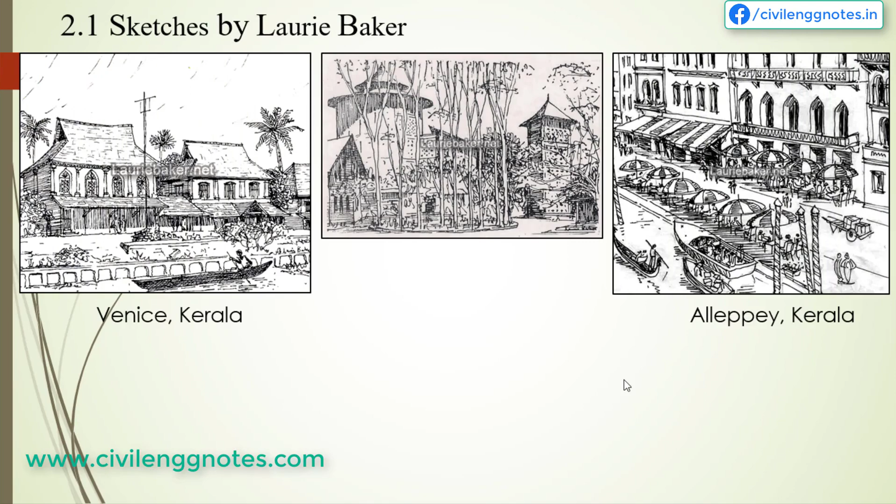Here are some of his drawings. Believe it or not, Baker made all these drawings by hand. He took old pieces of paper from envelopes and other waste plain papers and made a diary-fashioned book, which he always carried wherever he went.

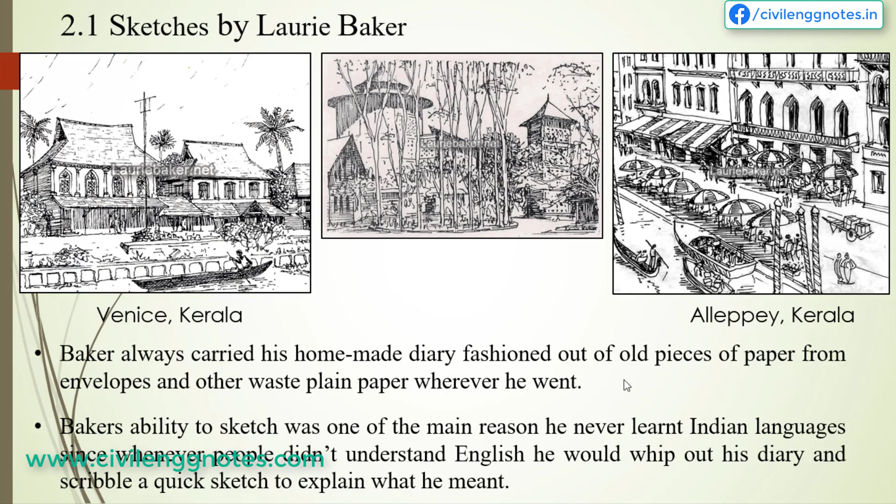Baker's excellent ability to sketch was one of the main reasons he never learnt Indian languages properly. Whenever people could not understand his language, he would bring out his diary and scribble a quick sketch to explain what he meant. Now let's talk about the principles he followed in his work.

The first of these is his respect for nature. We can always see his consideration for local climate, prevailing wind direction, and use of available topography while designing a house. Baker always tried to place small water bodies in proper places so that cool air could enter the house in summer.

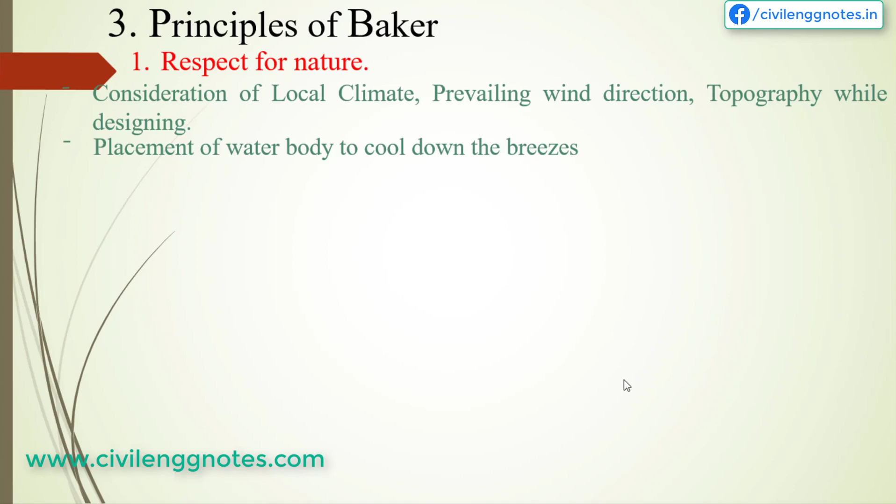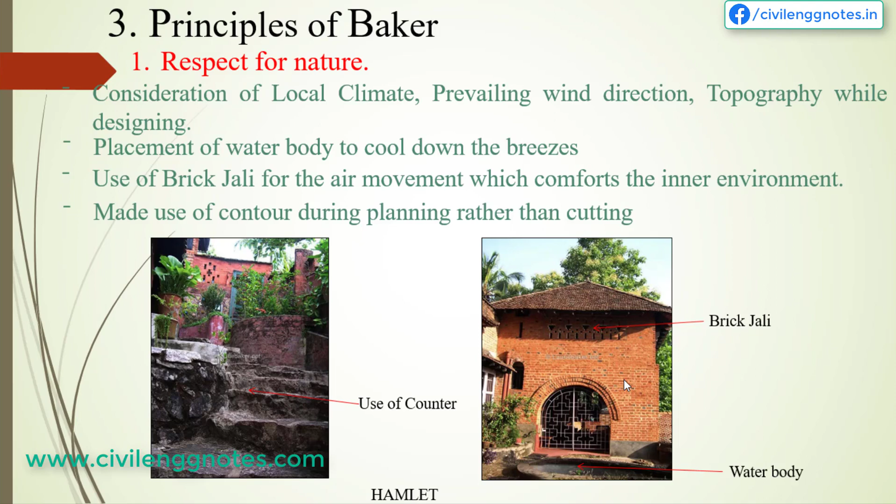Instead of using grilles or wooden windows, Baker used brick jali for air movement, which comforts the inner environment while reducing construction cost. He also made use of contours during planning to reduce cutting work, which ultimately reduces the cost of construction.

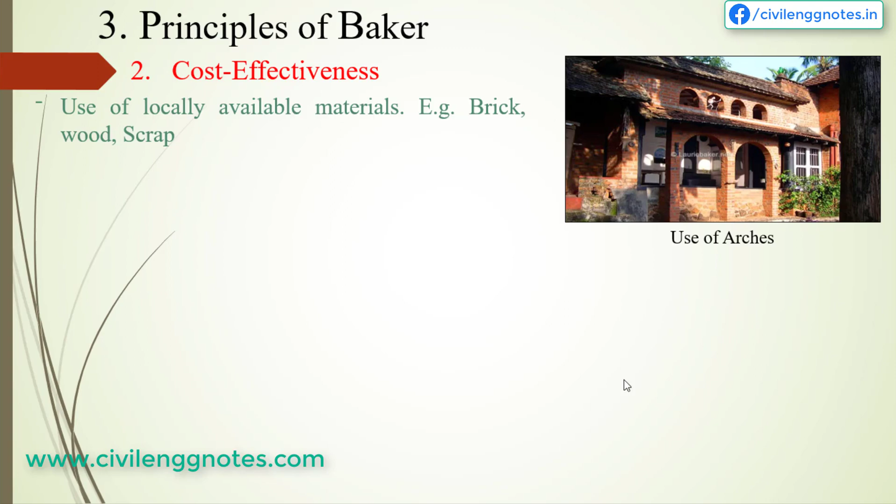Baker's second principle was to make the building cost effective. That's why he always used locally available materials such as brick, wood, scrap materials, etc. He also tried to reuse some materials when possible. We can also notice reduction of unwanted structural elements along with reduced use of fabrication work in his design.

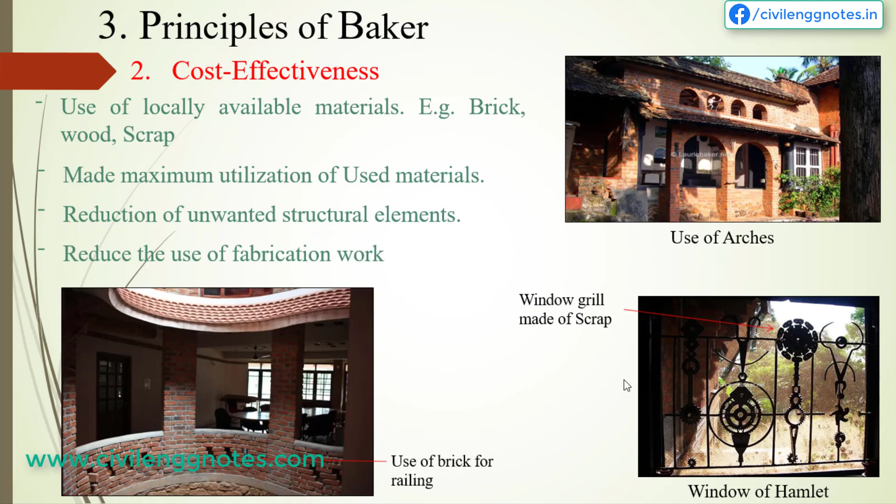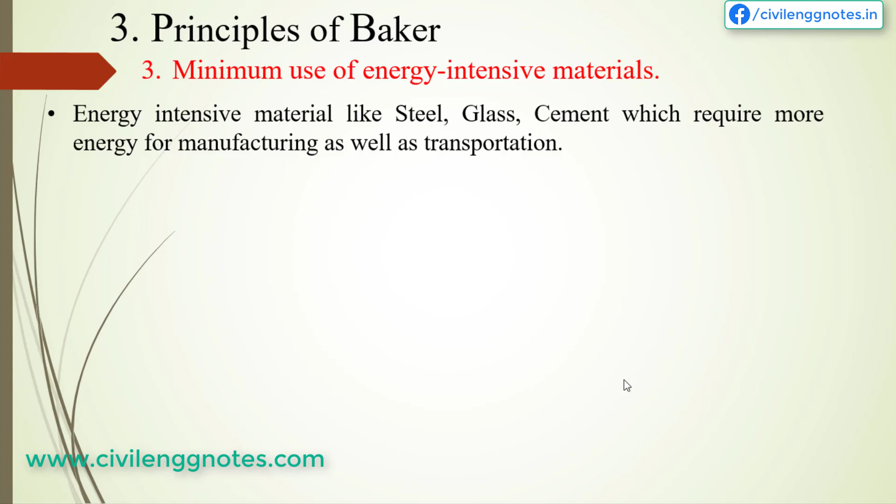Baker's third principle was to use minimum energy-intensive materials. Materials like steel, glass, and cement, which require more energy for manufacturing as well as transporting, are called energy-intensive materials. In their place, use of locally manufactured and available materials like red brick and wood seems more economical as their transportation cost is minimum. As an economical material, he also used Mangalore tiles.

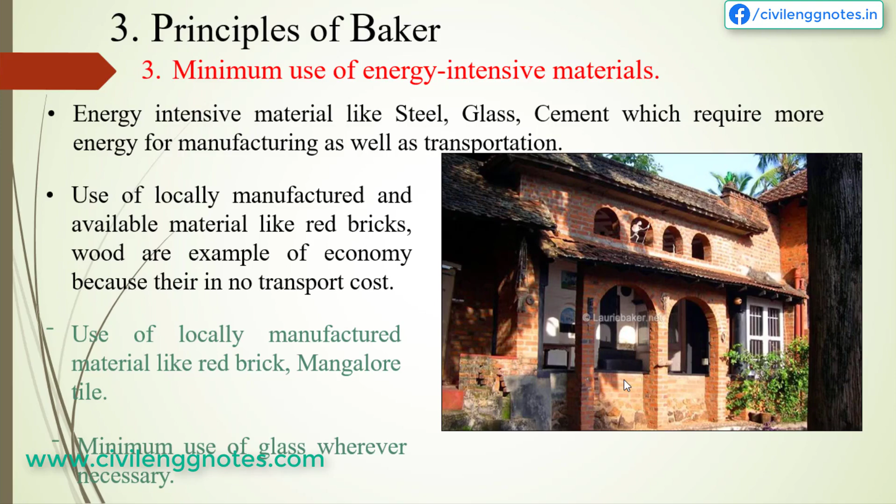Use of glass and steel was kept minimum, only when necessary. His other remarkable principle was waste minimization using local techniques and materials, which ultimately creates a cost-effective and beautiful building, including his own house, the Hamlet.

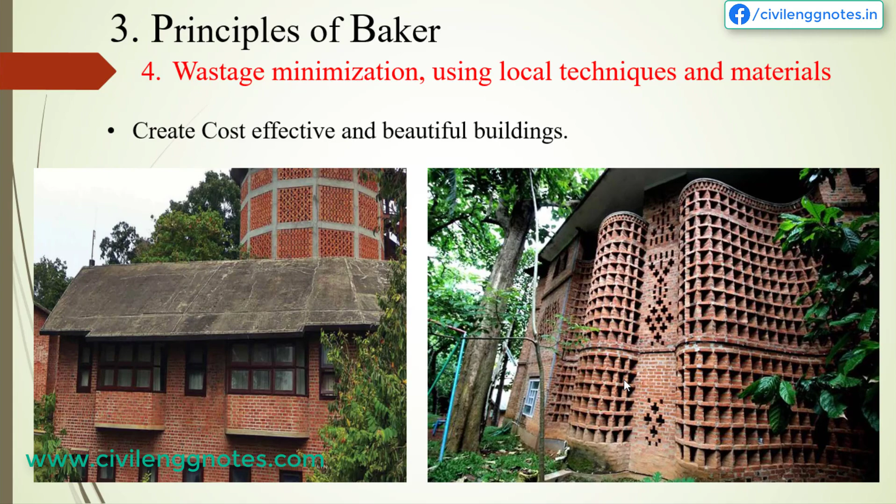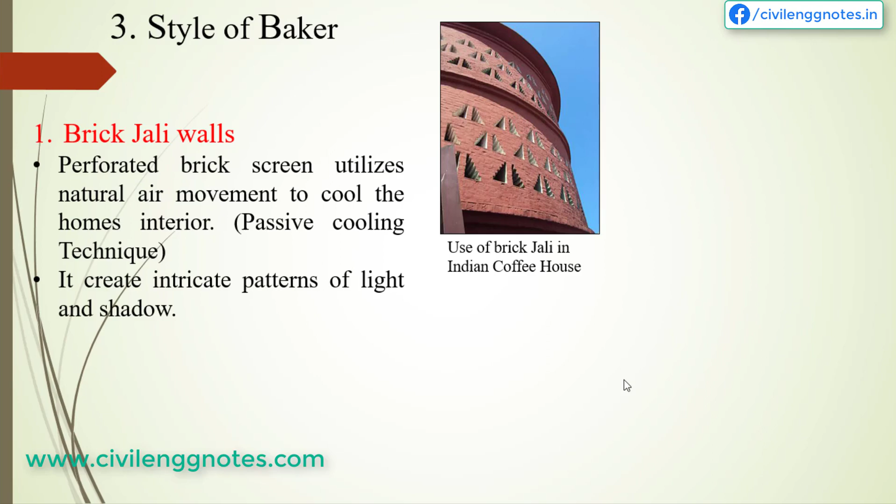If we talk about Baker's design style, we can see a lot of use of brick jalis. This perforated brick screen utilizes natural air movement to cool the interior of the house, and also creates an intricate pattern of light and shadow. Another style was the use of traditional sloped roofs with gables and vents.

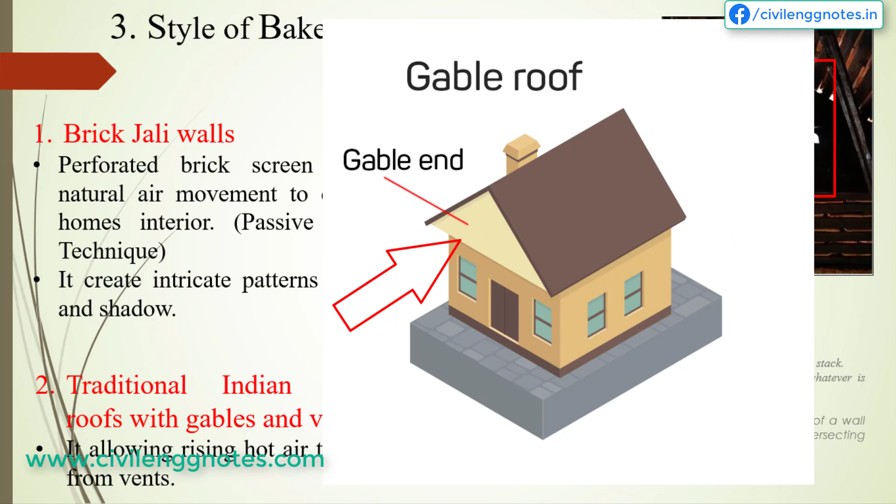Gable means the triangular side portion of a sloped roof. This sloped roof allows easy escape of rainwater, snow, etc., as well as easy rising of hot air to escape through the vent.

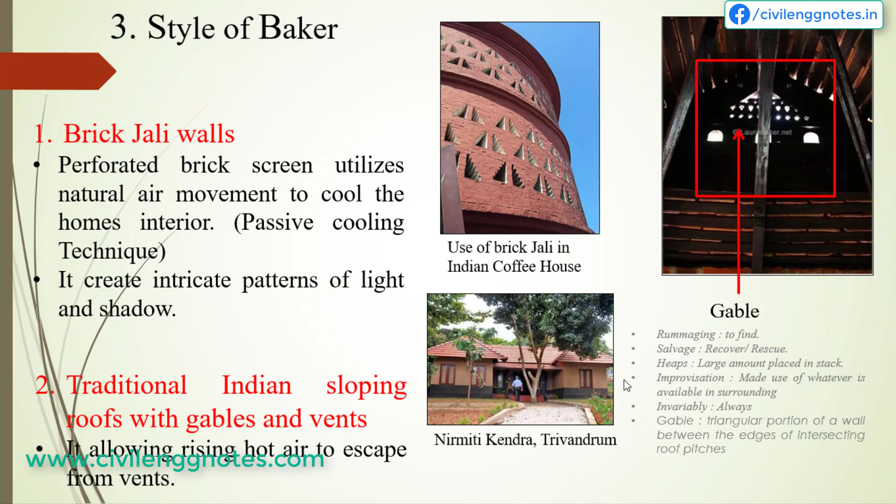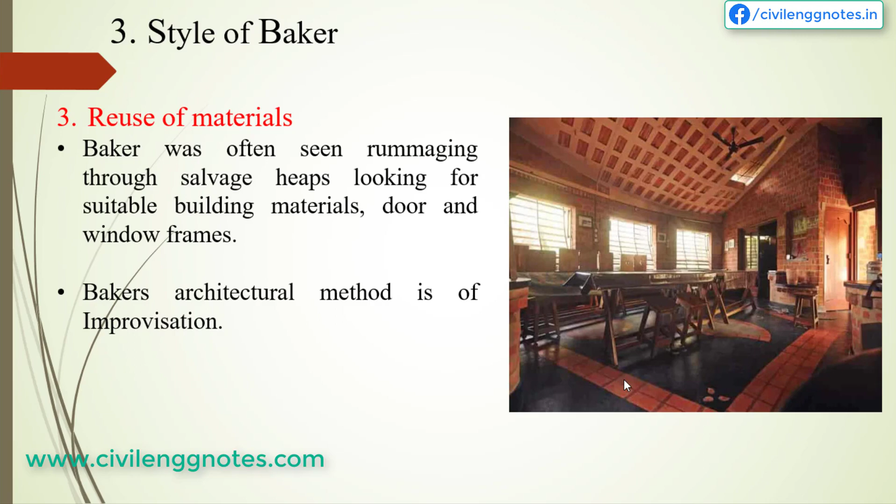Baker's third style was the reuse of material. He often collected suitable building materials, door and window frames from salvage heaps. Use of these old materials resulted in significant reduction in construction cost and also gave a sustainable design to the environment.

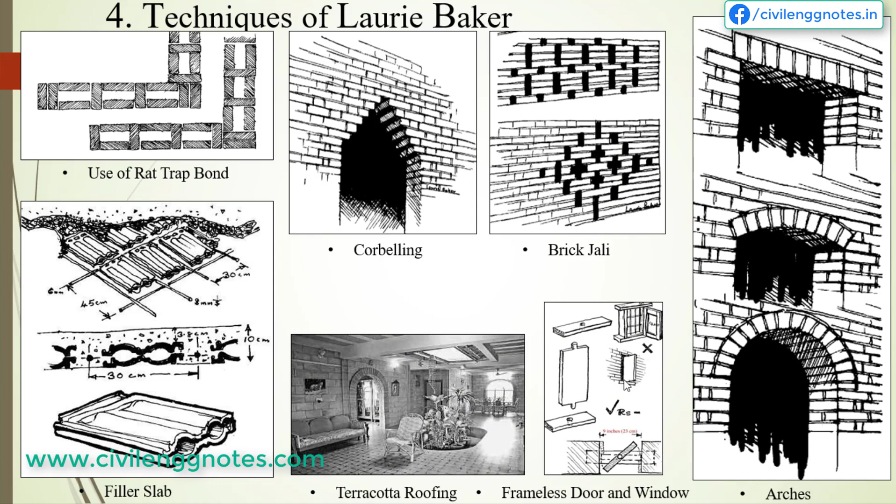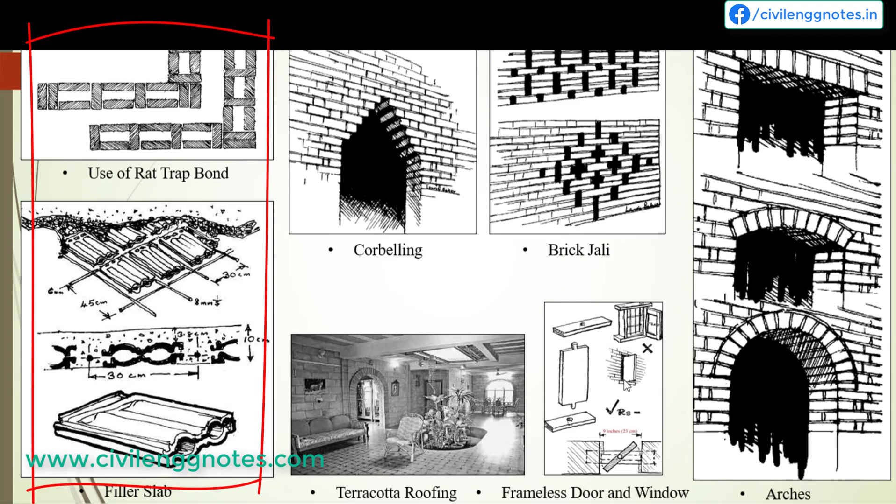If we talk about the techniques of Baker's design, we can see use of rat trap bonds, filler slab, corbel, brick jali, terracotta roofing, frameless doors and windows, arches, etc. In this video, I will mainly discuss the rat trap bond and filler slab in detail, because the other points are quite common. Still, if you want a separate video about those, let me know in the comment box, and I will make another video if required.

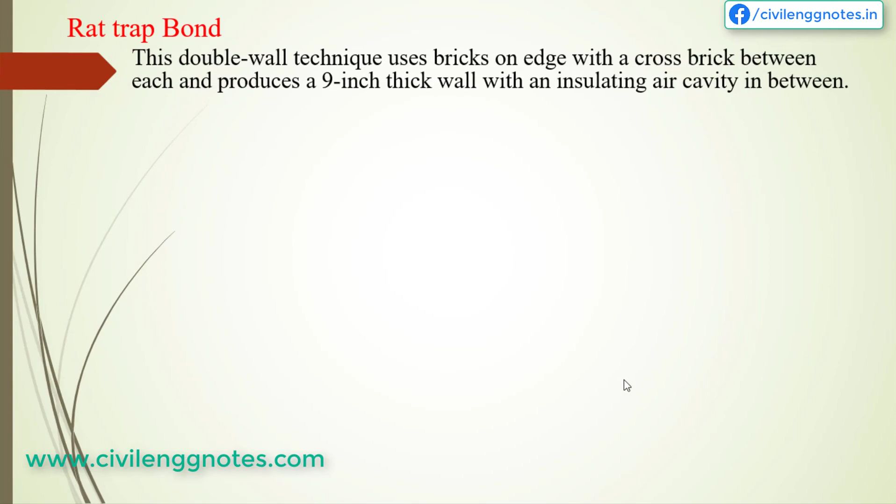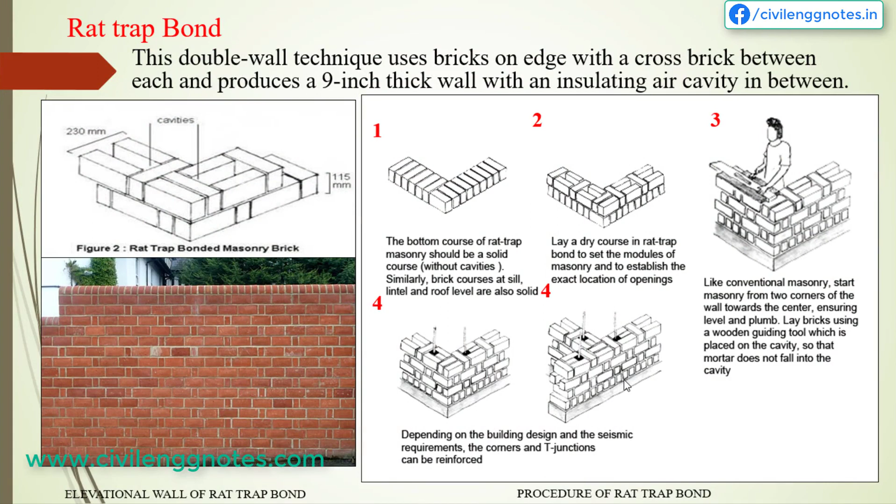So let's discuss the rat trap bond first. Rat trap bond is basically a double wall technique in which two bricks are placed on edge with a cross brick between them, like this. This produces a 9-inch thick wall with an insulating air cavity in between.

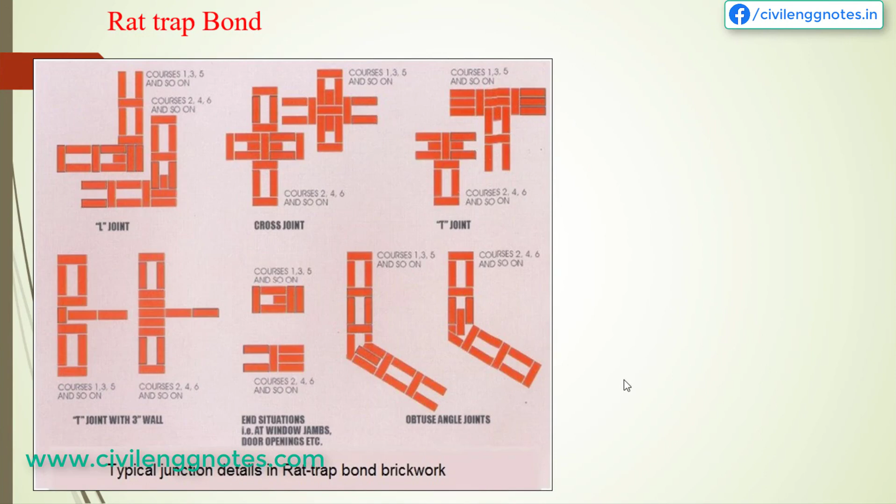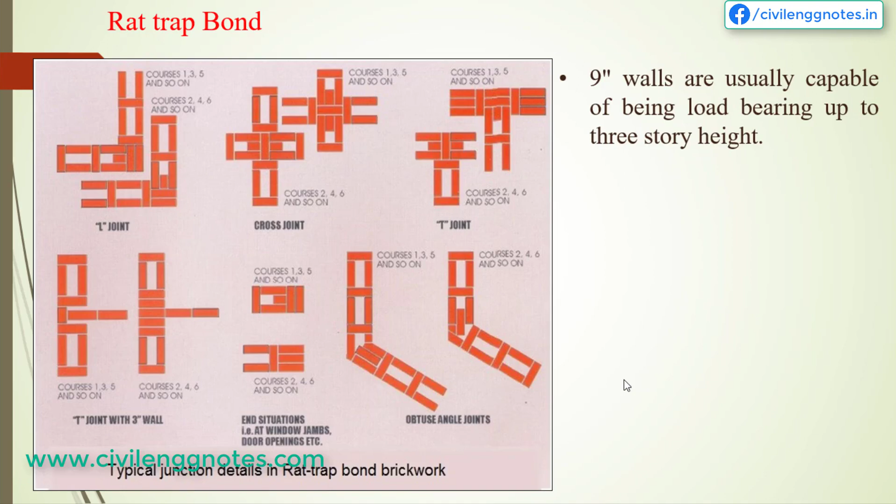You can see different joints like L joints, cross joints, T joints, obtuse angle joints, etc. in two consecutive layers. These 9-inch thick rat trap walls are usually capable of load bearing capacity up to 3-story height. An English bond of the same thickness requires more than 350 bricks, whereas rat trap bonds require only 280 bricks, and it also reduces the number of joints, reducing mortar consumption and ultimately causing cost reduction. Nearly 25% of bricks, mortar and other costs can be saved by using rat trap bonds.

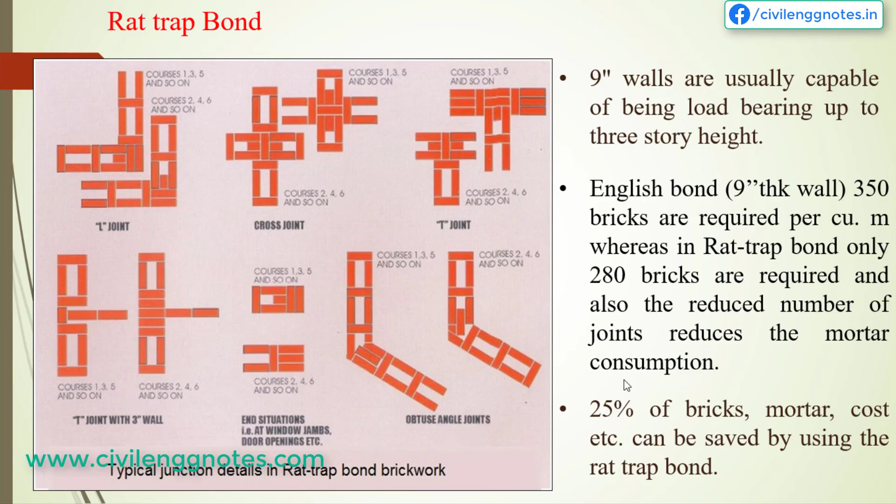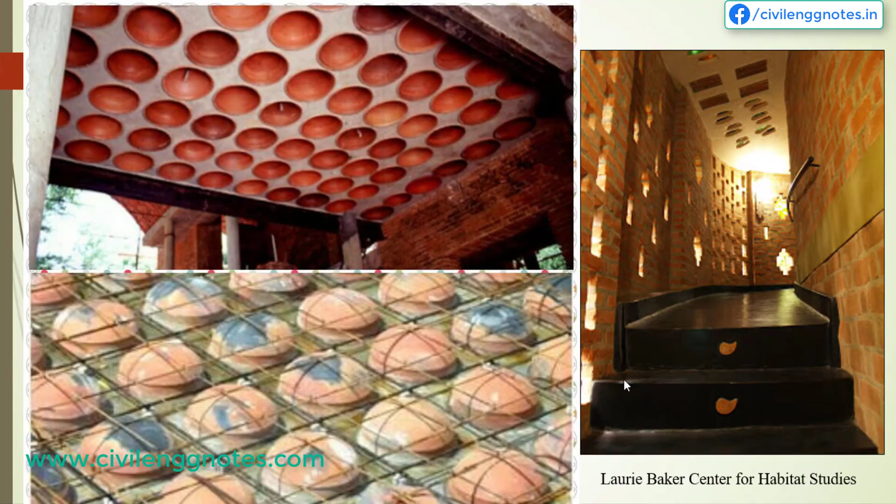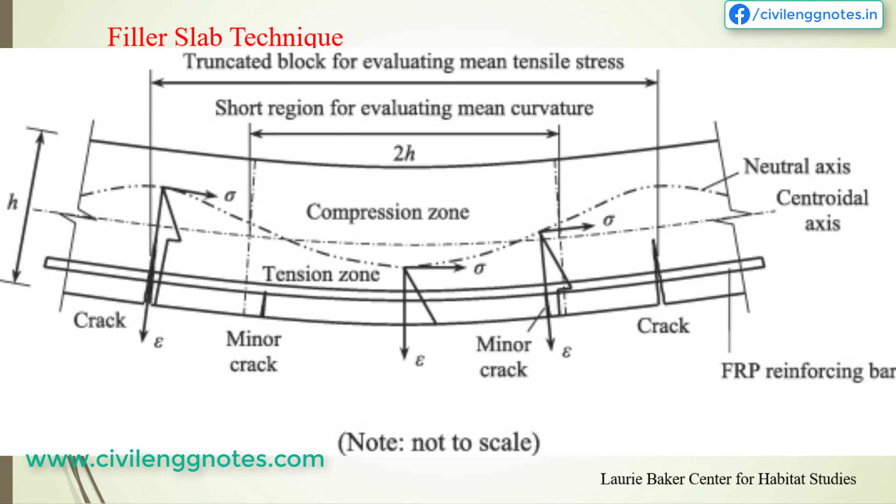Now let's discuss the filler slab technique. Filler slab is based on the principle of a simply supported slab, meaning the slab simply rests on the supports at the edges only. We know that the upper part of a simply supported beam or slab is subjected to compressive force, taken by concrete, and the lower part is subjected to tensile force, taken by steel reinforcement. Therefore, the lower tensile region of the slab does not require any concrete except for holding the steel reinforcement together.

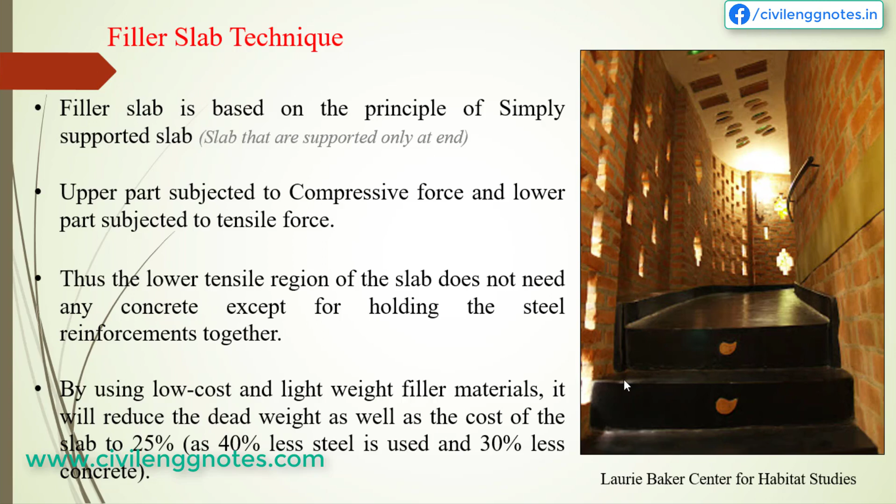Thus, by using low cost and lightweight filler materials, it will reduce the dead load as well as the cost of the slab by nearly 25%, as it requires 40% less steel and 30% less concrete. As discussed, the bottom portion of the slab takes tension via steel reinforcement. We can remove some of the concrete from the tensile zone where it is not much necessary, and that is the key behind the filler slab construction technique.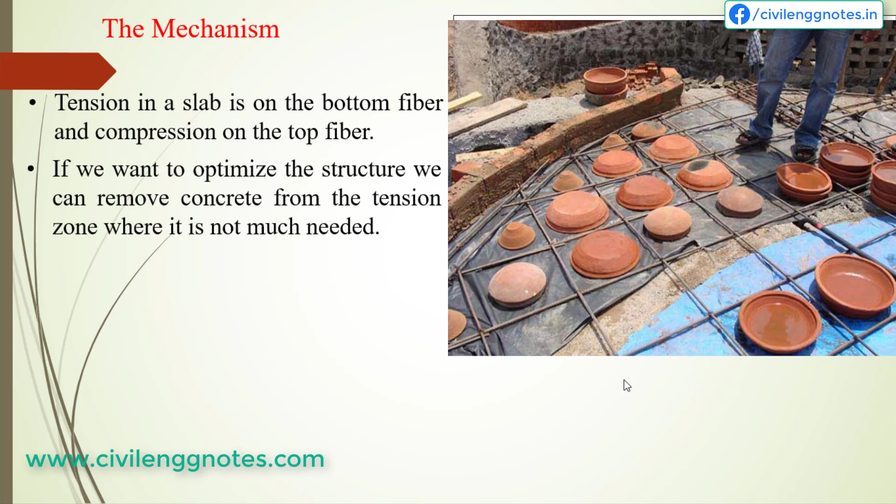Filler slab is basically a mechanism to replace the concrete in the tensile zone with filler material. By reducing the quantity and weight of material, the roof becomes less expensive yet retains the strength of a conventional slab. The most popular filler material is roofing tiles. Mangalore tiles are placed between the steel ribs and concrete is poured into the gap to make a filler slab.

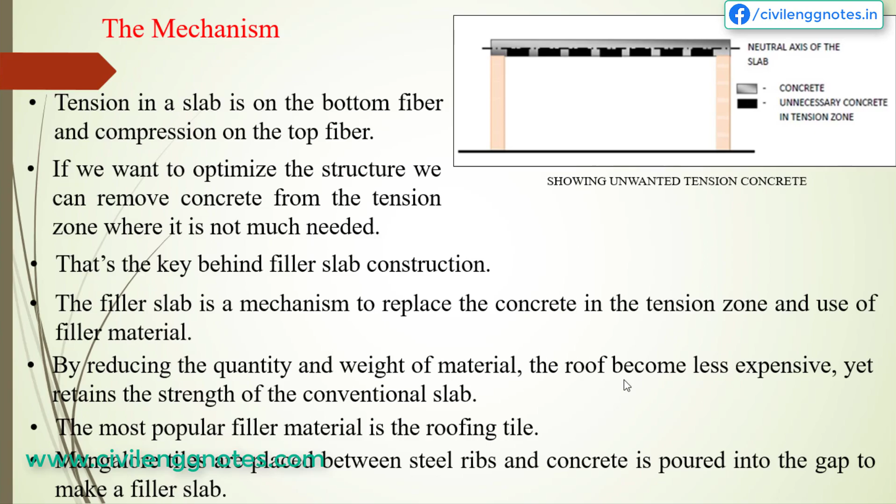Lightweight and inexpensive materials can be used as filler material. These include Mangalore tiles, burnt clay bricks, hollow concrete blocks, stabilized mud blocks, hollow mud blocks, clay pots, etc. Even coconut shells can also be used as filler material.

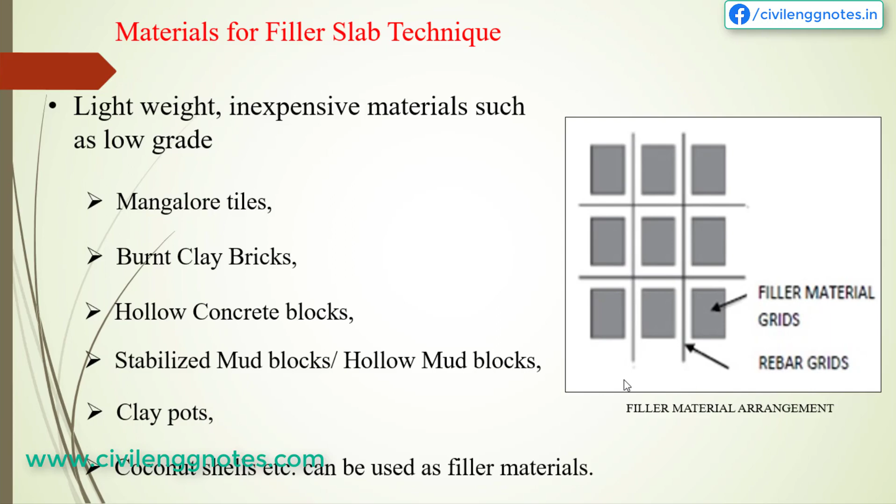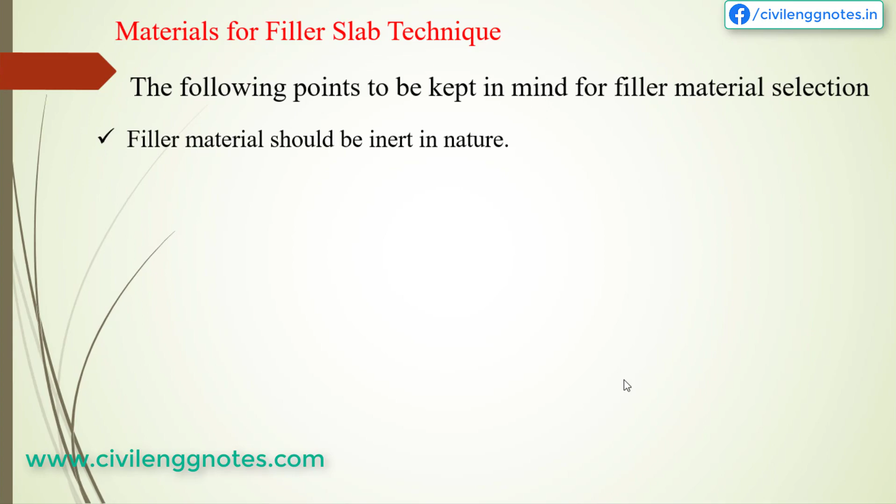When selecting filler materials, the following points should be kept in mind. First, the filler material should be inert in nature, meaning it should not react with the concrete or with the steel in the slab. Second, the filler material's water absorption should be checked, otherwise it will soak the hydration water from the concrete. Third, the filler material should be as light as possible so the dead load can be minimized. Fourth, filler materials should be cheap in price so that it costs much less than the slab material it is replacing. This is very important to achieve economy.

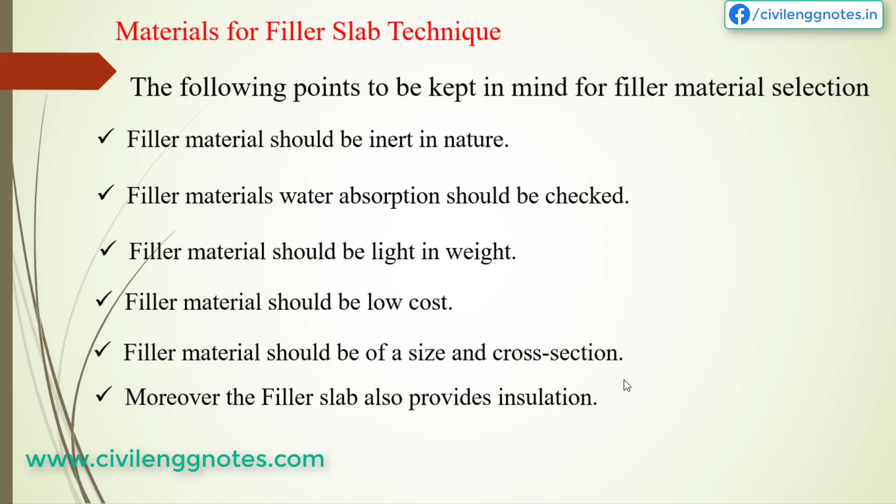The size and cross-section of the filler material should be checked so it can be placed within the available space. Sixth, filler materials should also provide insulation from outside climate. Moreover, the filler material's texture should match the desired ceiling finish requirements so as not to produce any ugly ceiling pattern.

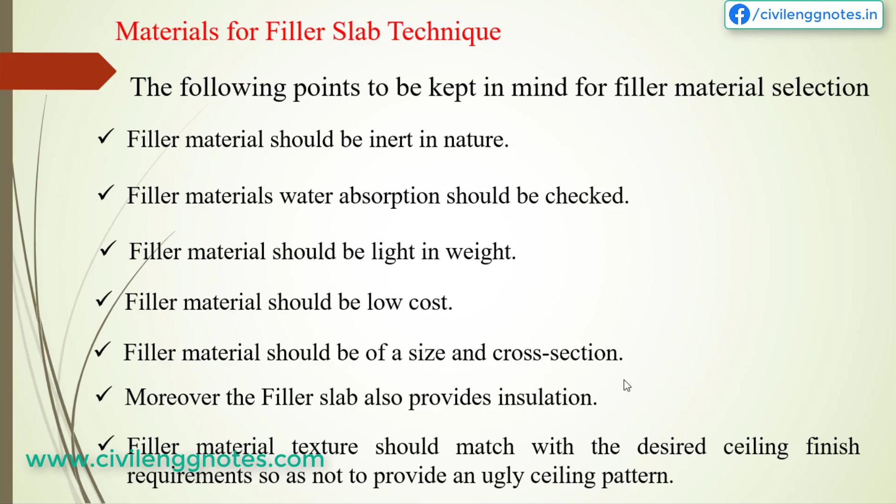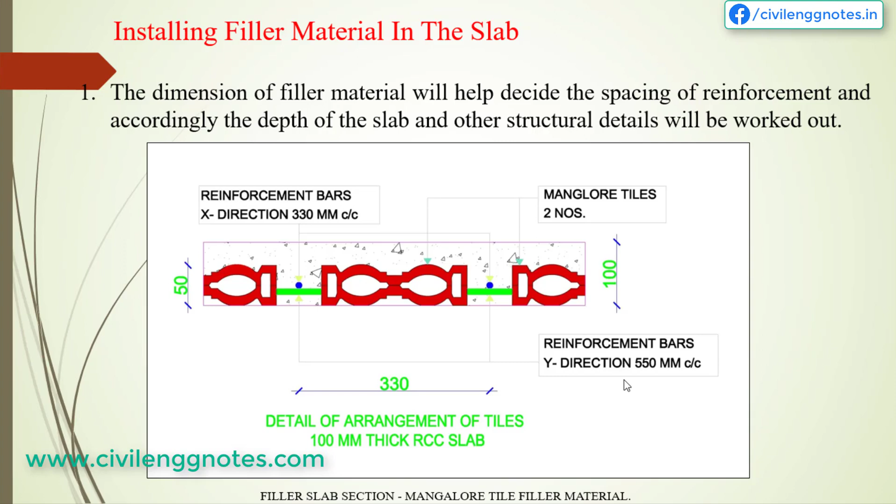The dimension of the filler material will help decide the spacing of reinforcement, and accordingly the depth of the slab and other structural details will be worked out. Therefore, it is necessary to choose the filler material before the design is carried out.

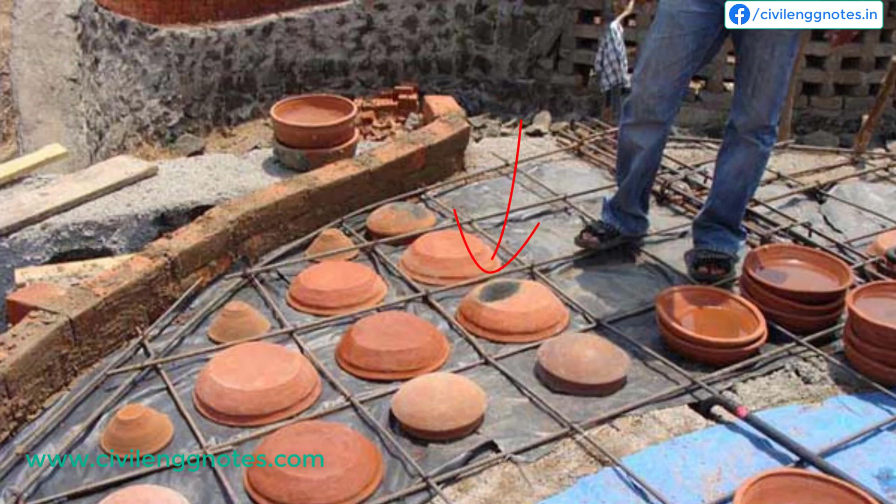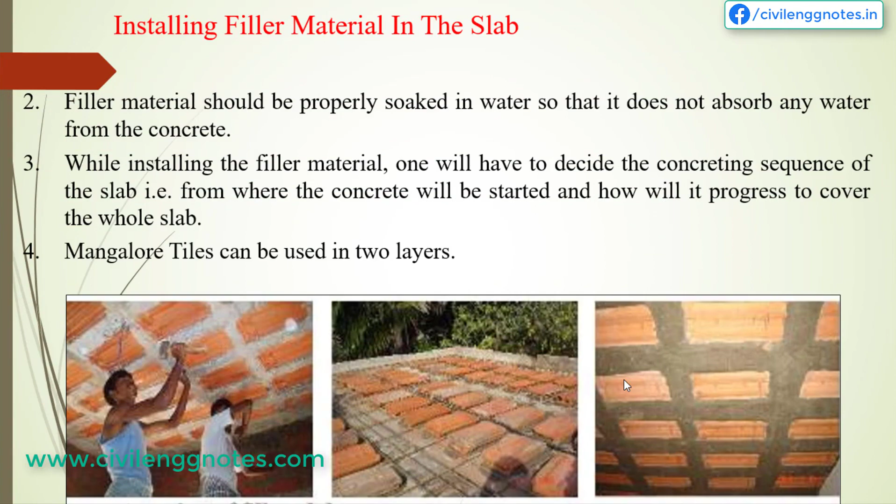Before installing the filler material, it should be properly soaked in water so it does not absorb any water from the concrete. While installing the filler material, one will have to decide from where the concrete placement will start and how it will progress to cover the full slab. Filler materials like Mangalore tiles or clay tiles can also be installed in two layers, one over the other, thus entrapping an air cavity between the two tiles, like this.

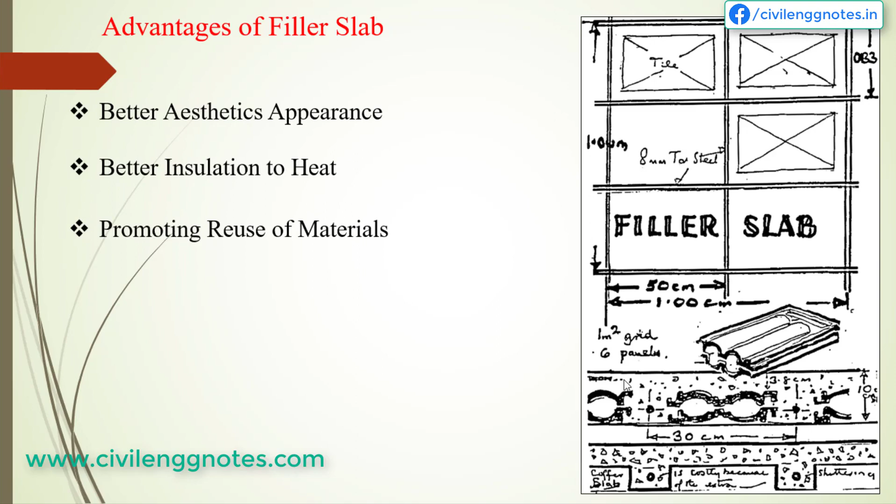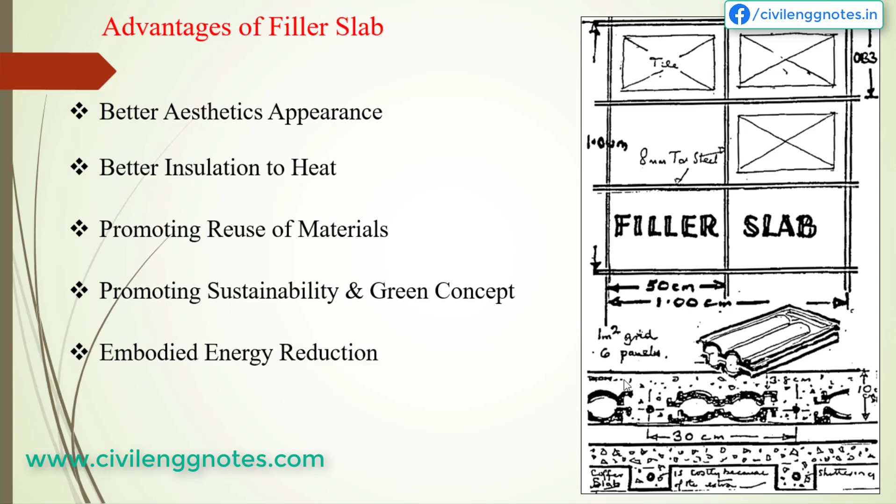If we talk about the advantages of using filler slab, here are a few. First, it gives better aesthetic appearance. Second, it gives better insulation to heat. Third, it promotes reuse of materials. Next, it promotes sustainability and green concepts. Fifth, reduction in embodied energy. Sixth, carbon dioxide reduction. Seventh, considerable saving of cost, etc.